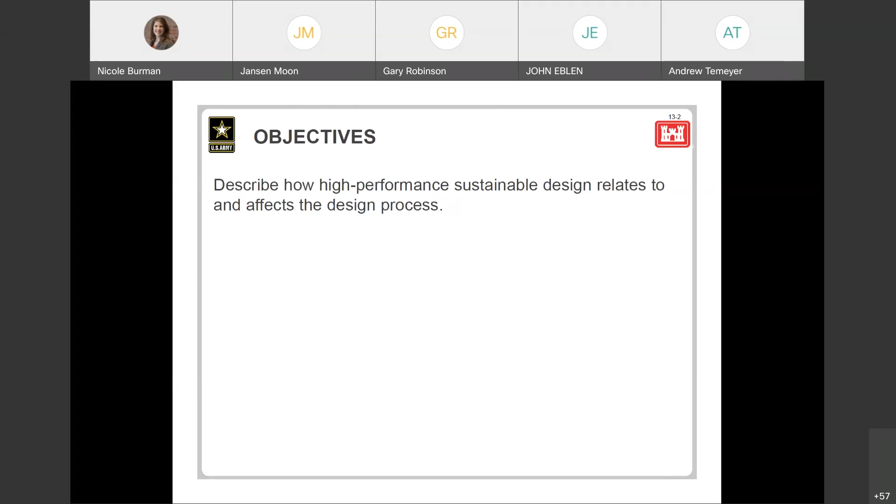So the objective today is to describe how high-performance sustainable design relates to what we call a typical design process, and we're going to try to kind of wrap a bow around some of the topics that we've talked about during the programming phase and describe how all of this relates to the total project delivery lifecycle.

As far as resources go, there's quite a few. I even cut some out from what we sometimes present, but obviously there's UFC 1-200-02, International Green Construction Code. There's plenty of LEED resources online. As far as how we relate this to the typical Army project delivery process, AR 420-1. The MRSI site is still available and has some resources. I'm not entirely sure if all of those resources are current, but there's still a lot of content on that site. If you are looking to relate this to Air Force design and construction process, there's AFI 32-1023 and a variety of other AFIs that you can begin to look at.

And then ultimately, over the last couple of years, there seems to be an effort to reconcile our design process and design vocabulary with maybe more industry-wide terminology. So you'll see a little bit of that in this presentation. The Architect's Handbook of Professional Practice is where we're pulling some of the design phase terminology for this presentation.

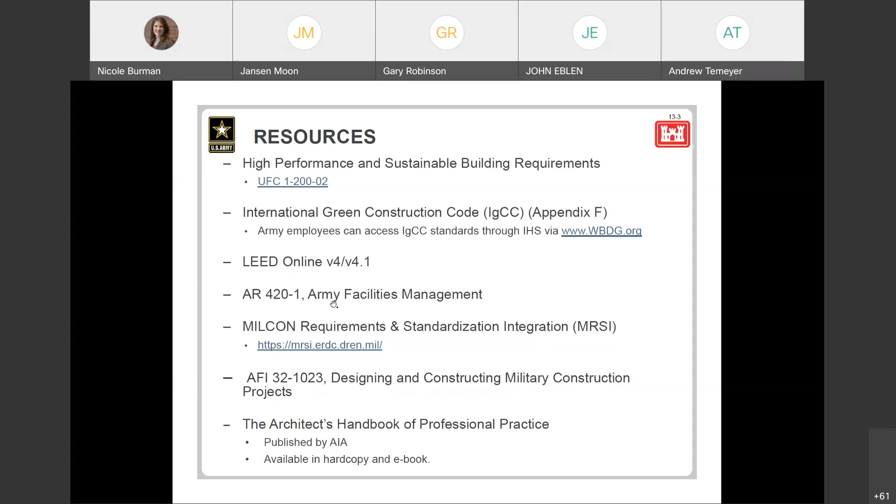And once again, when we talk about that terminology, schematic design, which we're going to roughly state is up to 35% design. Design development is 35 to 65% design, maybe in some more Army or USACE-based terminology, and then construction documentation would be from 65% to 100% design.

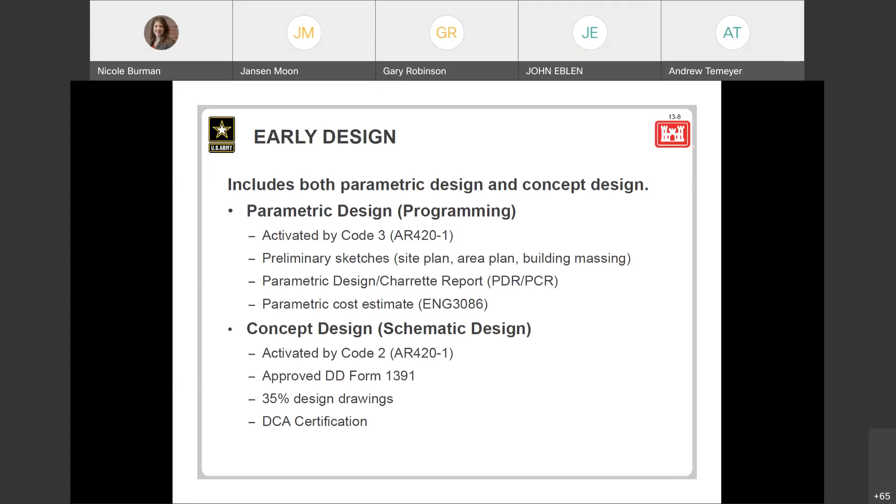Here's a side-by-side comparison. We've already talked through parametric design, and we've also talked about concept design to a certain extent during the programming presentation a few weeks ago. Ultimately, the OSD policy that we'll do a little refresher on has really forced our projects to accelerate to 35% design in the total project execution timeline, so that our projects have a level of definition early, giving our stakeholders the opportunity to change their 1391 scope and budget thresholds with a more robust design. So under parametric design, you're more high level, trying to have a basic study of the project scoping requirements, and then concept design builds on that to approximately a 35% design effort.

As a reminder, for programming you're ultimately identifying a project team, conducting research on project requirements, your location, maybe some basic study of your building form. You're starting to talk about sustainability features, but probably more broad strokes. You may be doing a deeper dive on new technologies and systems appropriate for the project, looking at low impact development and shared resources the project may leverage in delivering a more integrated project. You're setting and prioritizing scope and budget goals, and ultimately developing a 1391 or draft 1391 and a parametric cost estimate.

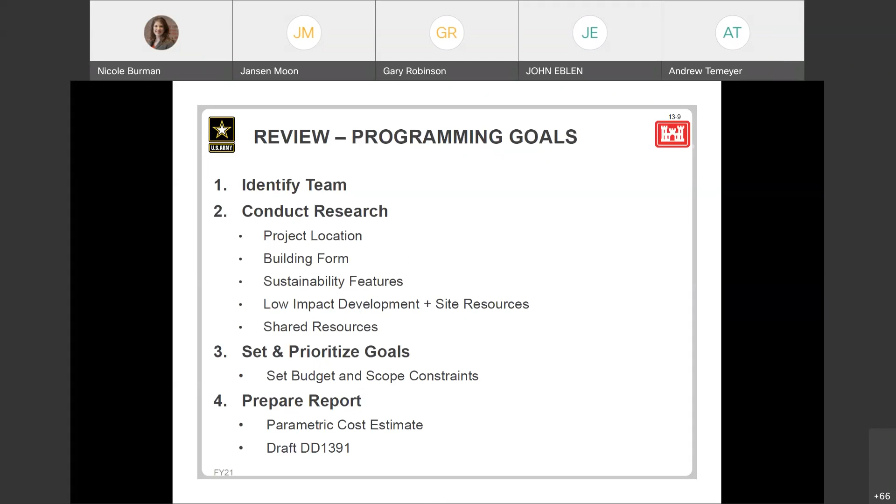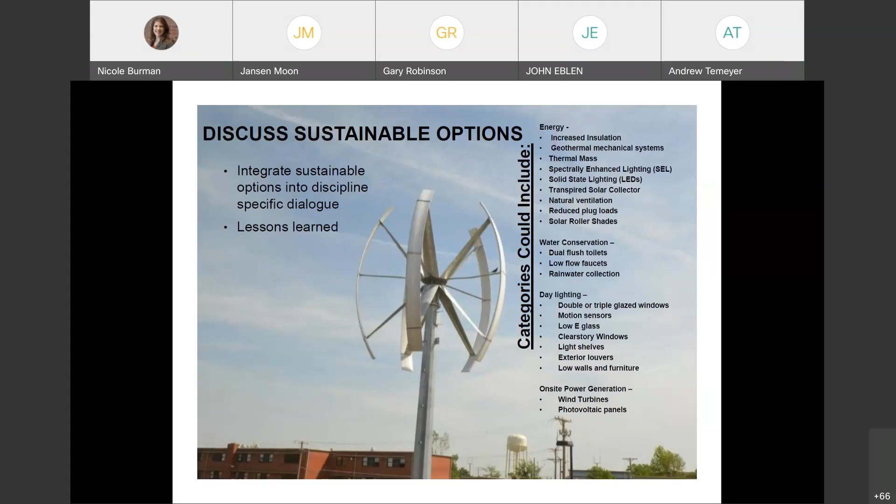Sustainability is still part of that conversation. There are all kinds of sustainable features that could be part of the discussion during these early phases of the project delivery process — we're not going to go through all of them.

Energy modeling is still part of the equation. You can start some preliminary energy models, as we talked about. They don't have to be the full-blown compliance models you'll see later in design, but some quick modeling, some massings, a study of building form and shape, or different building systems in a more iterative process to help determine the proper system selection for your project. You can do things like daylight analysis or study of orientation on the project site to help hammer down how much square footage you need in the 1391.

This is just a reminder that there are all kinds of tools out there to help you conceptually understand your project requirements and study those in order to make sure you can deliver on those goals later. I think some of this was output from Ecotect — I'm not even sure that's a software anymore, maybe we need to update this slide.

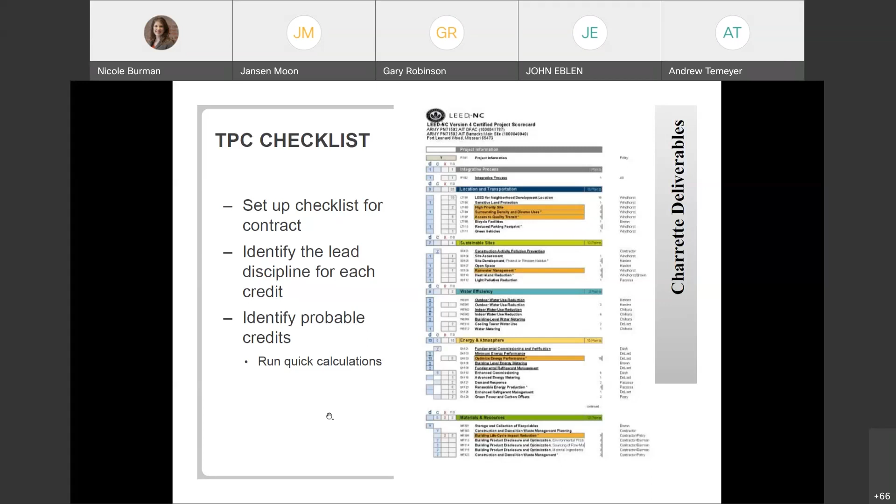It's never too early to start your third-party certification checklist. The different services have different third-party certification requirements, but ultimately you can start getting a handle on what credits you think may or may not be applicable to the project. You can run some quick calculations, and like we discussed during the programming discussion, sometimes you can even start running actual calculations on water savings and stuff like that. You really can start diving into this early so you're not surprised by constraints later.

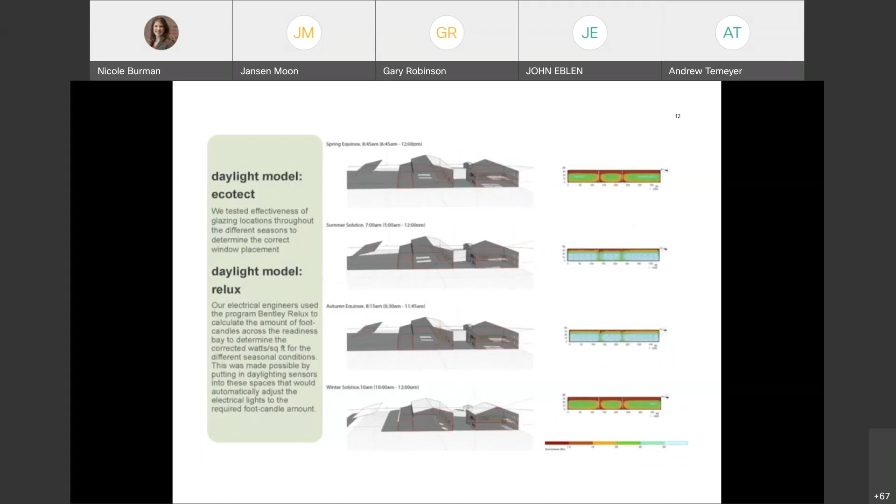Do you know what software for the daylighting was shown for modeling? I believe this was our question. I don't know if it was this page or the one before. Yeah, I think this one was Ecotect, listed up here in the little green box. Once again, I'm not even sure that Ecotect is an active software. It was produced by Autodesk, but looking at the previous page, actually. Was it? I know this is from Ecotect as well, the daylight analysis.

I think we've used different tools within our district. You can do something simple, as long as you orient your model correctly—you can use SketchUp. Ecotect used to be a tool that we used. We haven't used it recently, so I apologize that I don't know whether it's still available, but I don't think it is. We've done some more robust analysis in AGI, but that's certainly not our preferred approach. It's a little too complex for the level of development we're typically at at this stage.

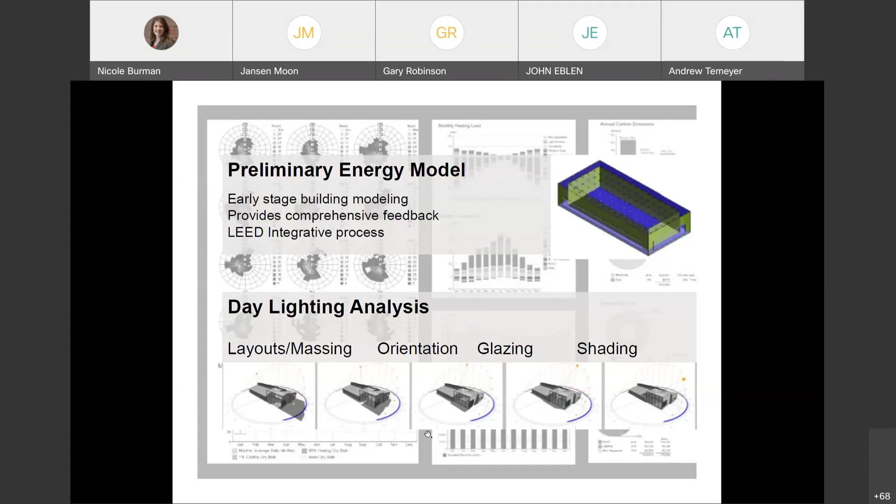You should also be completing your sustainability record cards. There are different record cards for the different services. I believe this is the Army one, and it can be found on the whole building design guide, but make sure you're using the correct one. I think most services are tracking some sort of compliance tracker like this, and ultimately these are supposed to be completed at each design phase. I'm not aware of any that aren't. It helps make sure you have a good pulse on sustainability mandates, metrics, and requirements throughout the project lifecycle.

All of that is done in service of making sure that when you kick off your schematic design phase, you're as well positioned as you possibly can be. With these current OSD requirements, it certainly feels like there's a huge rush to get to 35% design right now, and I'd argue that's to the detriment of the project and the PDT. But ultimately, having a robust and complete PDR or PCR document and associated programming documents really helps make sure the project starts off on the right foot.

So kicking off the schematic design phase, it's extremely important that you identify a project delivery team to the greatest degree that you can. Make sure you have a handle on your programming constraints via some sort of draft DD 1391. I see in our presentation we kind of switch between a draft and an approved one—I think that's partly confusion with these new OSD requirements, which we'll dive into. You should have an idea of the owner's project requirements defined by the PDR or PCR, and then either have some indication of a basis of design, or you'll be defining your basis of design through that schematic design phase.

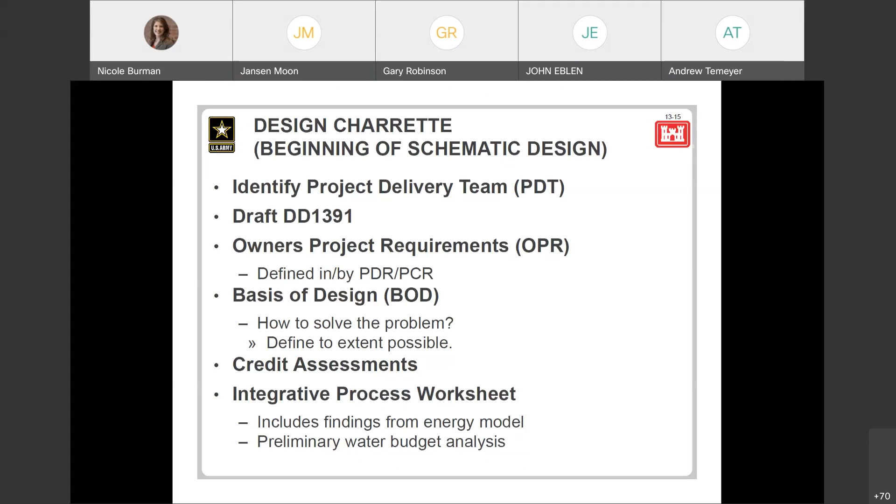As far as identifying your project delivery team, this is a lot of times managed by the design team lead or the project manager, the two working together. Develop a PDT directory and make sure the PDT all understands who plays what role. This helps identify and create a sense of responsibility and ownership in the project, and hopefully gives the team a broader picture of all the individuals that support a project. It's not uncommon, if you develop one of these on a fairly straightforward project, to have 50, 60 people supporting a project in one manner or another.

Make sure that roles and responsibilities and lines of communications are clear. This is another topic we'll cycle back on - we're all aware of the complexities and timelines associated with the design process, but it's helpful to keep your PDT as consistent as you can, from programming all the way through construction contract award and beyond. The less turnover, the less potential for lost knowledge or inability to reach out and understand the guiding logic for why certain decisions were made.

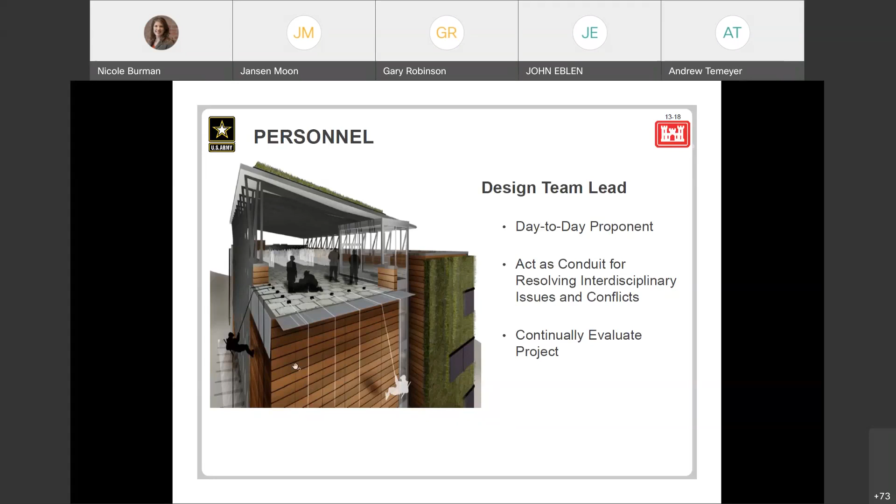I think it's really important for your design supervisory structure - sometimes it's easy for managers and supervisors to lose track of the ever-evolving policies and requirements associated with sustainability. So make sure there's an awareness that continuing education is going to be necessary to keep pace with all of that, both within the staff and the supervisory structure themselves.

I'll speak for Omaha District - I think it's been a bit of a struggle sometimes to include robust QC procedures on specific sustainable deliverables. So that's something we're continually trying to improve upon. Things like QCing LEED forms and things like that, they kind of happen off on the side, and ultimately those are really critical to making sure your project succeeds on a sustainability front. So again, I'm not sure I have all the answers to that, but I think that's something there needs to be awareness of.

And making sure there's an awareness that when we talk high performance sustainable design, it may require more specific skills, and may require a bit more effort during design phase and some additional time, or it may need to be staffed more appropriately, as well as design budgeting. The whole idea of this process is that we're spending a little bit more time in design, a little bit more design funding, to realize a more high performing solution that will operate more efficiently in its end state or in operations.

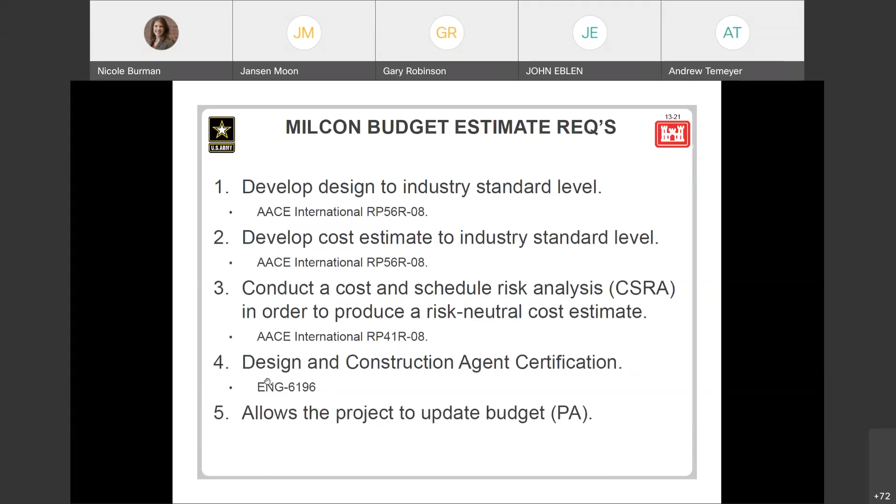And the whole power of this is that it allows our stakeholders, if they so choose, to adjust their budget within the typical budgeting life cycle for a project.

Again, during schematic design, it's not super centric to the DCA process, but research products and equipment, meet with product representatives.

This is probably focused on, obviously every project is not completely unique on its own right. Projects are often the result of some variation of the last project that the PDT executed, and so you're building on experience that you have collected over time.

Ultimately, there should be some focus on doing a deep dive and investigation on systems that you're not familiar with, and then delivering on that in a manner that allows you to manifest those in design and design detailing throughout the project lifecycle, to prevent the possibility that you lose sight of that somewhere along the timeline, and end up with missed expectations or inability to integrate that within the project constraints.

Then begin to develop a more robust understanding of how different systems are going to integrate with one another, and continue to perpetuate that trade-off process of how wall color may affect my lighting design, or how my exterior wall selection may impact or limit or promote mechanical and electrical design decisions. Make sure that there's always some natural tension there, but focus on balancing those priorities in a more unified and integrated solution.

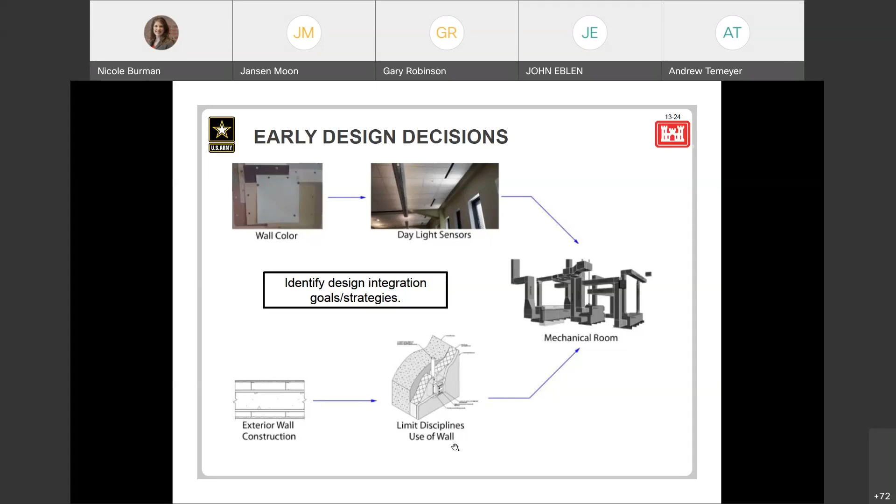So ultimately, things like, this is just an example, solar tubes. I'll speak for our district. It's a sustainability feature that we've used a lot, and we seem to favor, because they provide a huge amount of daylight with minimal cost input, and they're fairly easy to integrate into a design. However, they do affect things like your artificial lighting design, and they may impact certain structural design decisions or finish selection, things like that.

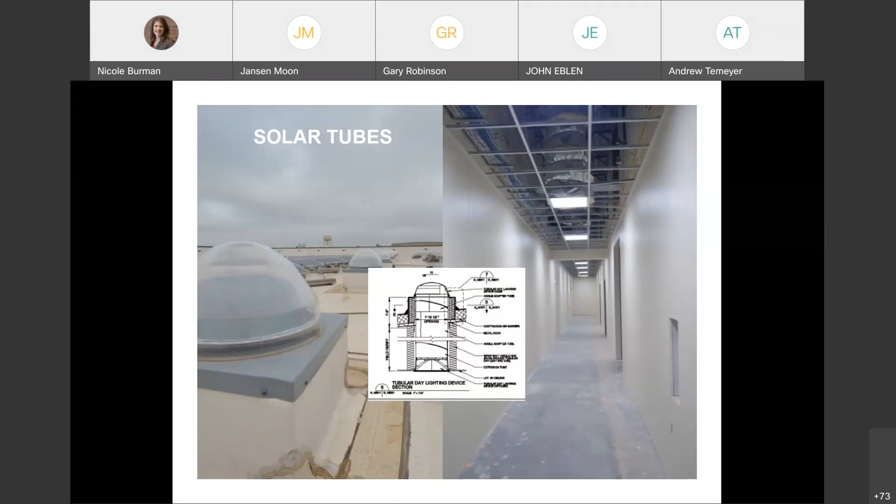So make sure that those preferences are identified early, and that the entire PDT knows that those are being tracked, so that you can coordinate those throughout the project lifecycle. Begin your LEED credit documentation.

There's all kinds of documentation that can happen early, and I think we've talked about some of this stuff before, but ultimately, define your FTE count and analysis. We sometimes do this as a memo, so that the PDT can pull it up, include it in the design analysis. This is not your code-based occupant analysis.

This is more of a sustainability-oriented analysis. How many people are going to be in the building? How many transients may you have? What's your building operation schedule? Things like that, because those will impact mechanical design, or may impact your electrical design, as well as the architecture of the building.

And so you can also begin, and sometimes even finish, your water calculations, get a grasp on things like sustainable site credits, and a variety of other things.

Storage and collection of recyclables may vary a little bit depending on what third-party certification tool you're using, and what the installation level process is for storage, collection, and disposal of recyclables.

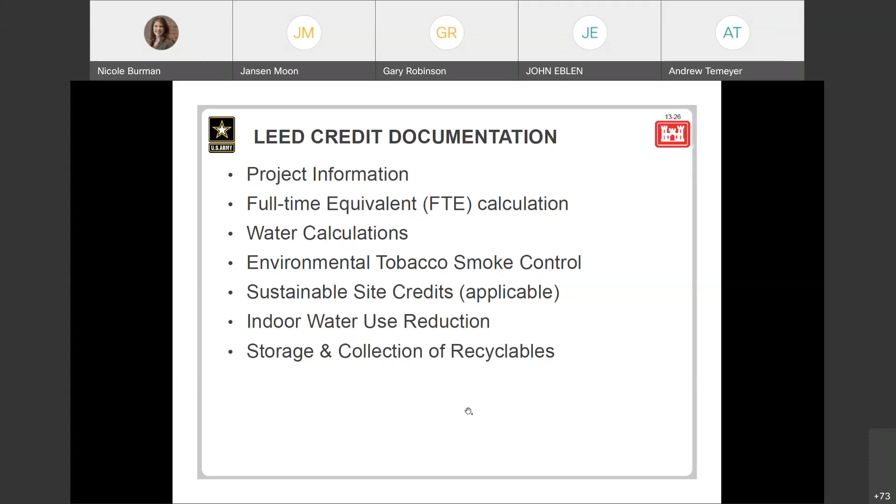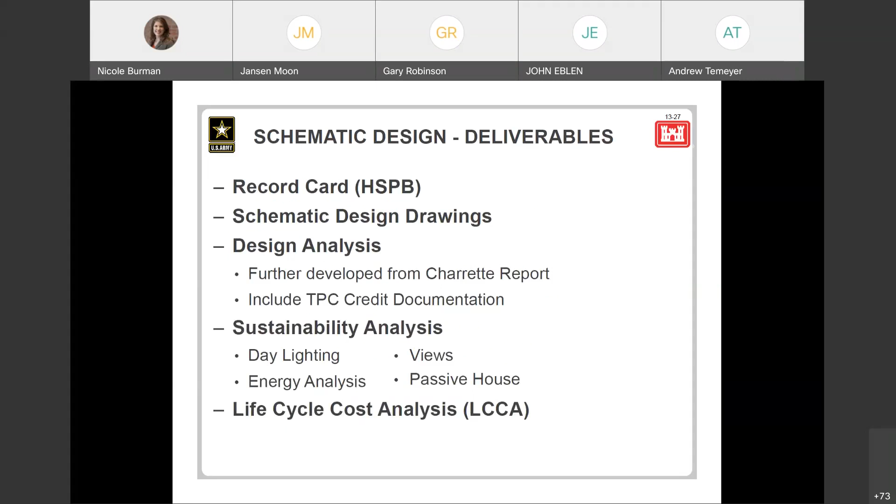Again, we're kind of starting to bridge between the design year and budget year, and that transitions us into design development. So in trying to tie a bow around what the goal is for design development, you're trying to identify, coordinate, and make all design decisions that affect other design disciplines. That's in service of making your construction documentation phase that follows this as simple and as risk-averse as possible, as far as design changes and things like that.

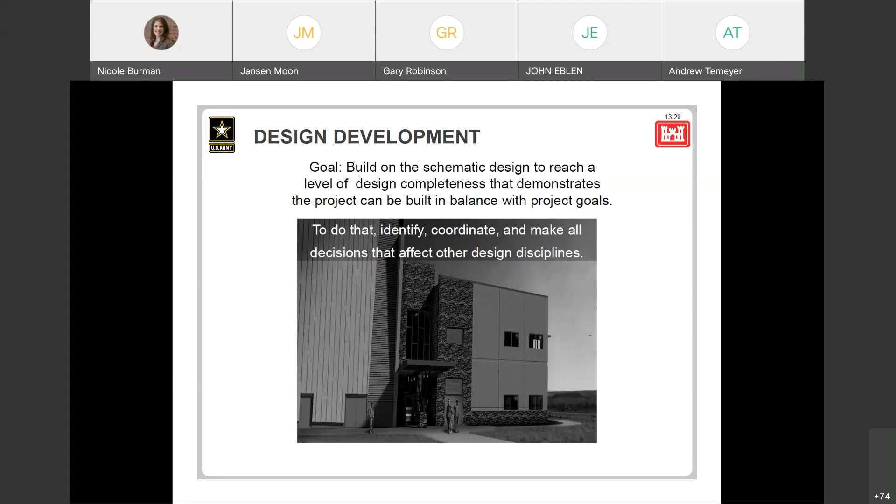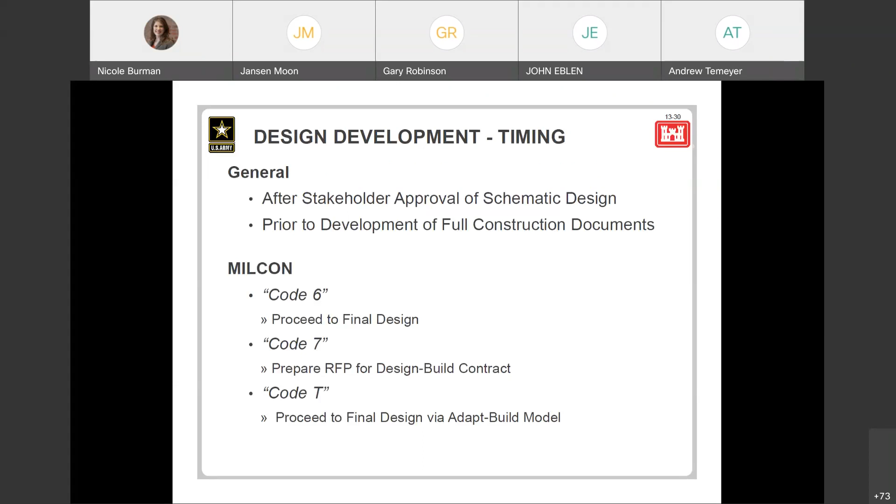This will occur after stakeholder approval of schematic design and prior to development of your construction documents. The MilCon code directives that you'd probably see attached to this are Code 6, Code 7, or Code T. Those are defined on the screen here, and again, those are defined in your AR 420-1.

I think there needs to be a pretty robust understanding that the whole idea with high performance design is that you are spending a little bit more money for a longer term payback, whether that's on the design or construction side. There's a huge burden on the PDT to do this, and there's a lot of contention about whether that means we can increase our design budgets, or maybe we're not getting more design money to deliver these projects. Ultimately, I think we've got to figure out creative ways and prioritize our level of effort in order to deliver on these expectations.

With high performance sustainable design, a lot of our processes come out of iterating on the last way we did things. So a lot of times our standards are developed out of how we did things in the hand drafting days, then they were modified for CAD, and then modified for BIM design delivery. Ultimately that's all rational and good, but at some point there probably needs to be consideration of whether there are certain things in our standards and processes that we should rethink to assure that we are delivering in the most cost-effective and efficient way possible.

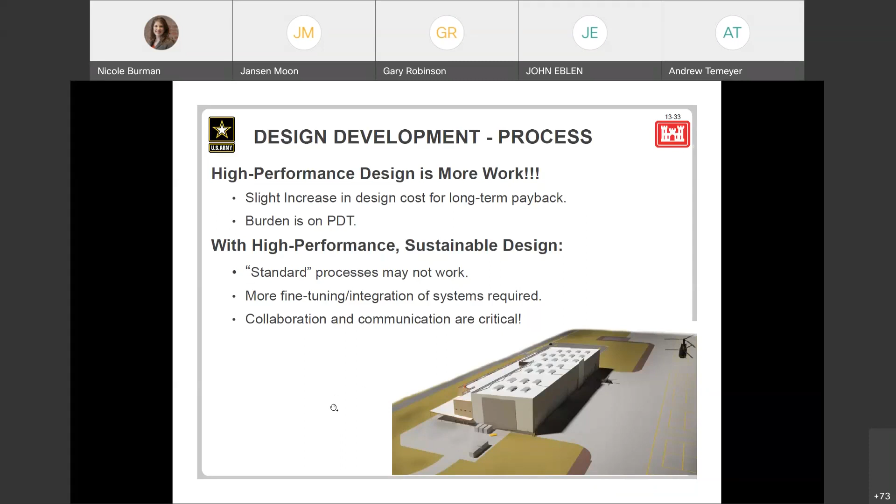As far as processes and making the most of the design development process, I know we talked in the prospect course about creating an environment where collaboration can happen.

In Omaha, we have what we call a BIM pit. It was created a long time ago. It's basically a room with a bunch of docking stations and screens where we can go in and collaborate in our BIM models. All of our designers can get around and in the same room and coordinate things that otherwise would probably happen in a cubicle, with the lines of communication a little bit disconnected. I'm not saying that's the end-all be-all solution for integrated design and collaboration, but think about ways that a PDT can do that. In the virtual world we're all kind of working from home now, those things may change a little bit, but I still think there's ways we can establish a more collaborative environment, and we need to find a way to do that.

Make sure that you're using the correct design tools for the level of design and development that you're in. I know we've talked about this in BIM circles quite a bit, but we tend to automatically default to the end product that we would do our CDs in. So if you need to do an adjacency diagram in planning, programming, or even schematic design, a lot of people would immediately open Revit. Well, is that really the right tool to communicate what you're trying to communicate? Is it requiring more effort than the payback figure you get by doing it in that tool? Make sure you're cognizant of not burdening yourself with just the default solution.

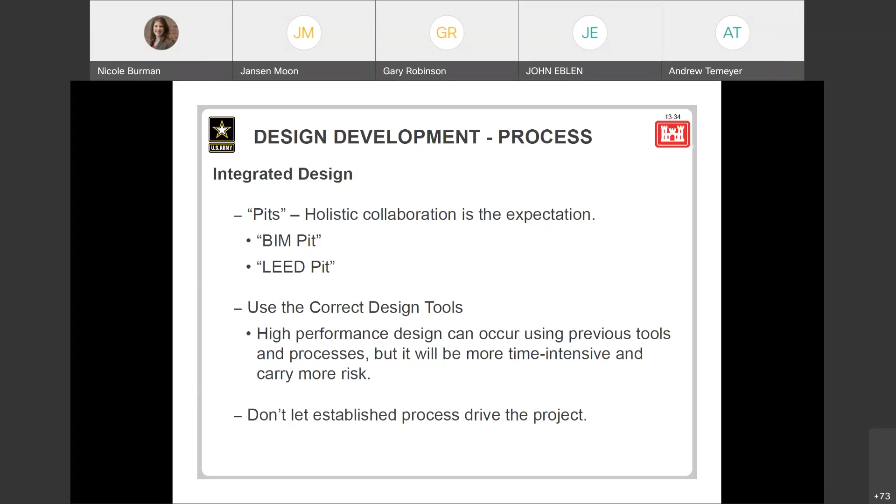Maybe a PowerPoint slide is a better way to communicate some of that stuff, and it would require a lot less time and effort on your part, and then you can catch up on the BIM stuff when you have a more resolved and clear idea of what you're modeling. And then try to resist letting established processes and norms drive a project in a certain direction if that's not what's best for the project.

Spend a little bit of time talking about BIM here. Ultimately, building information modeling, or BIM, is something that's at this point not that new to the way we deliver designs, but I'd argue it's absolutely a critical tool for facilitating an integrated design process. Using BIM is not going to make your project more sustainable inherently, but it creates a collaborative environment where not only are you looking at lines on paper and relying on your brain to manifest those lines in 3 dimensions, it creates a virtual reality representation of the building that you can then run, I'd argue, a lot more nuanced conflict resolution and integration against.

There are all kinds of BIM tools and BIM systems and potential analyses that you can conduct with all of the data that you feed into a BIM model. But once again, it requires a little bit more input of data on the front side in order to provide a more integrated solution on the back.

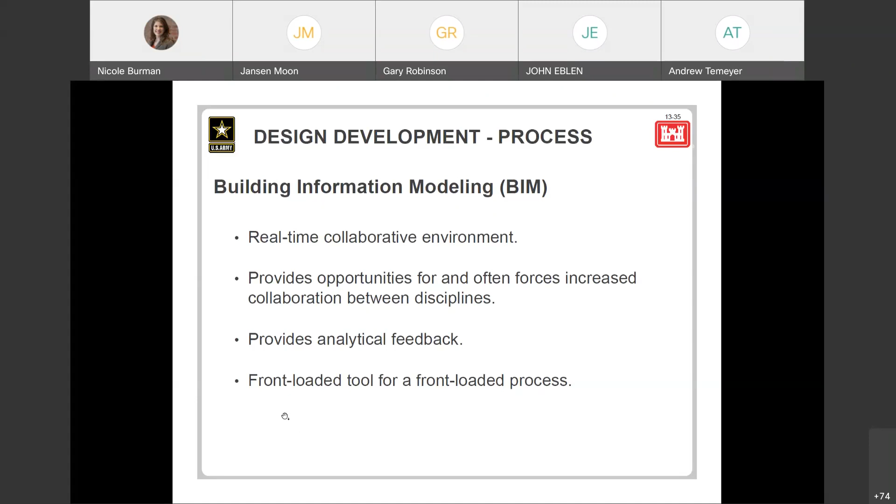Touch on energy modeling here. A lot of times it seems like energy modeling is something that's owned by, say, the mechanical engineer, and it's not clearly understood by the entire PDT, and it maybe is done once as a compliance model somewhere during the middle of the design process.

Ultimately, I really want to emphasize that energy modeling should be an iterative thing. You may not be using the same tool the entire time, but find a way to use energy modeling, whether it's conceptual energy modeling or compliance modeling or something in between, to drive design decisions. Ultimately, during design development, you should be finalizing your concept models and helping resolve complex coordination type interdisciplinary decisions and beginning your compliance models.

But do what you can. I know there's some software type limitations with energy models, but make sure that the entire PDT has some sort of access to the energy model and outputs to make sure that the correct inputs are being put into those systems.

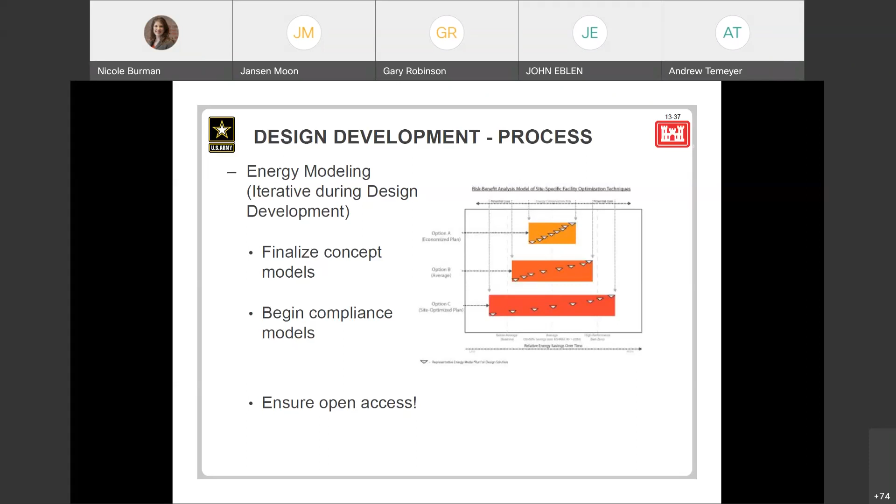So as you go about producing design development deliverables, I think it's really important - there's all kinds of standards out there about what we need to produce for deliverables in, say, a 65% design. But maybe think about the focus on really front loading all of this data input and analysis into a 65% design effort.

I think it can be stressful as a design team member to feel like you also have to produce deliverables that are maybe what a 65% CAD drafted solution may be. So ultimately, I think what we find is a BIM model has a lot of data and information in it, but if you have to feed that model with this vast quantity of information and modeling, it's also difficult to extract that information in the form of drawings and schedules on sheets in a time frame that's often expected of us.

So think of ways that you could potentially provide a stakeholder with the information they need, but in different formats. Could that be a virtual BIM model walkthrough? Could you work through the schedules in BIM rather than focusing on outputting them onto sheets? Is there a better way to deliver that information to assure you're going in the right direction, but also not creating a bunch of work that's not commensurate with the level of input you've already invested in the design?

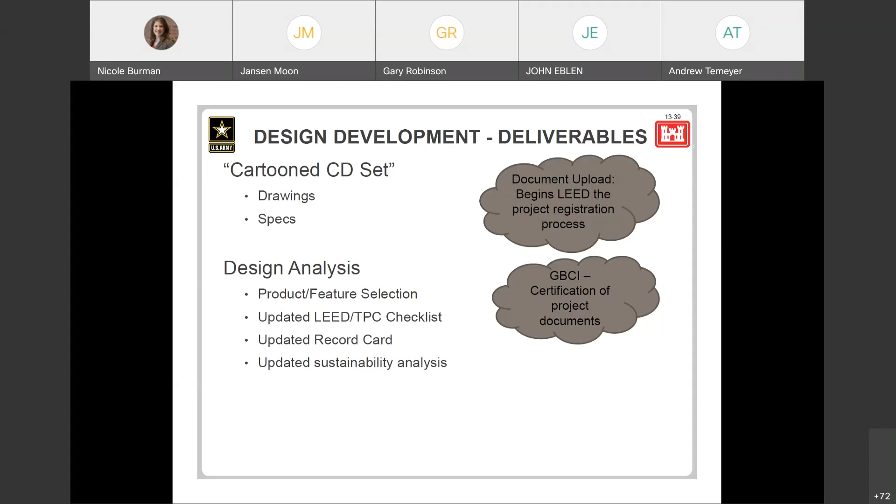Ultimately, you're looking to deliver in design development a cartoon construction document set that includes drawings and specifications - an idea of all the drawings you'll need to clearly communicate the design - and then a pretty complete design analysis that includes product and feature selection for the entire design, LEED or third-party certification checklists, another version of your record card, and a robust sustainability analysis that includes all of the analysis and inputs you've provided or applied to the project to date.

Again, as you go through design development, your main goal is to make all of those interdisciplinary design decisions so that as you move into construction documents, the burden for conflict resolution is as minimal as you can possibly get away with. Ultimately, you're still going to have to coordinate things during CDs, but your goal should be to minimize that burden. The reason is that the more interdisciplinary coordination you have to do during construction documentation, the greater the risk you may find a fatal flaw in a product or system selection that may translate to difficulty following through on goals and decisions made earlier in the design process.

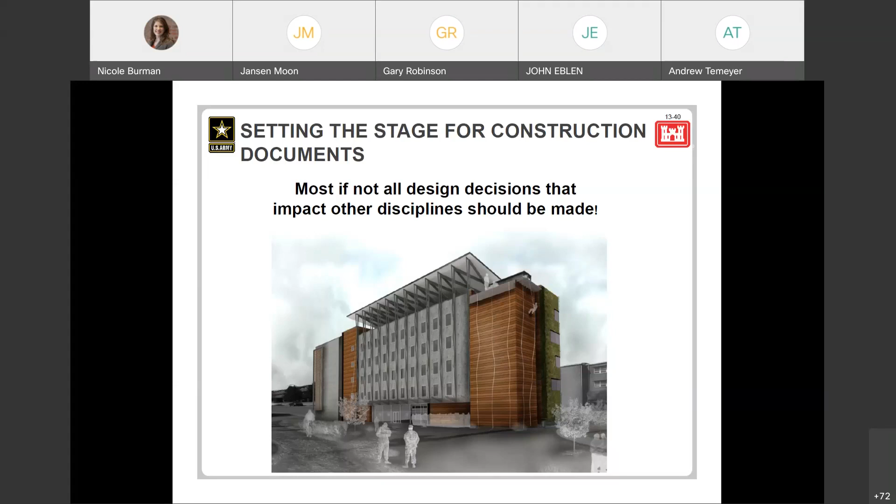Okay, so construction documentation phase. Sometimes it feels like this is the entire phase, I guess. Sometimes it feels like we start off at 35% design just focusing on producing construction documents. Ultimately, I think we're trying to create a distinction here that construction documentation is extremely important, but it is not the only thing you should be focused on as you deliver high performance integrated design.

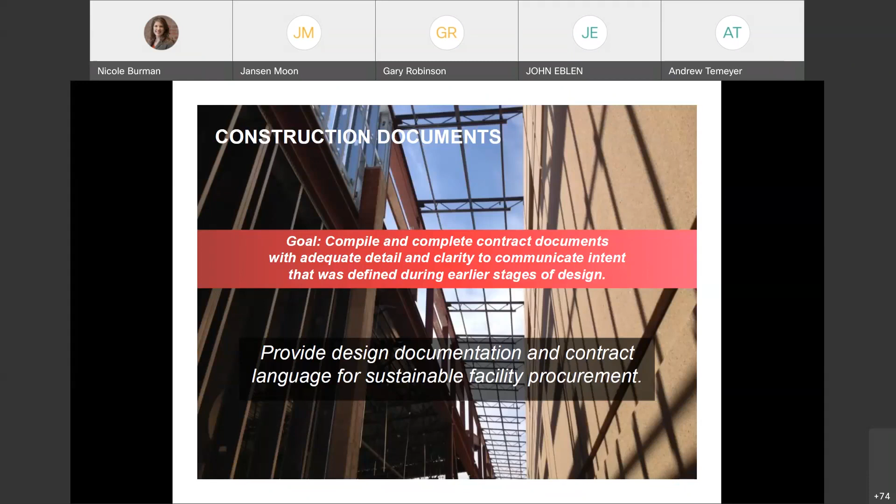So construction documentation phase is compiling contract documents with adequate detail and clarity so that you can execute a contractually enforceable construction contract. This occurs after design development - not during, not before - and then prior to advertisement and contract award.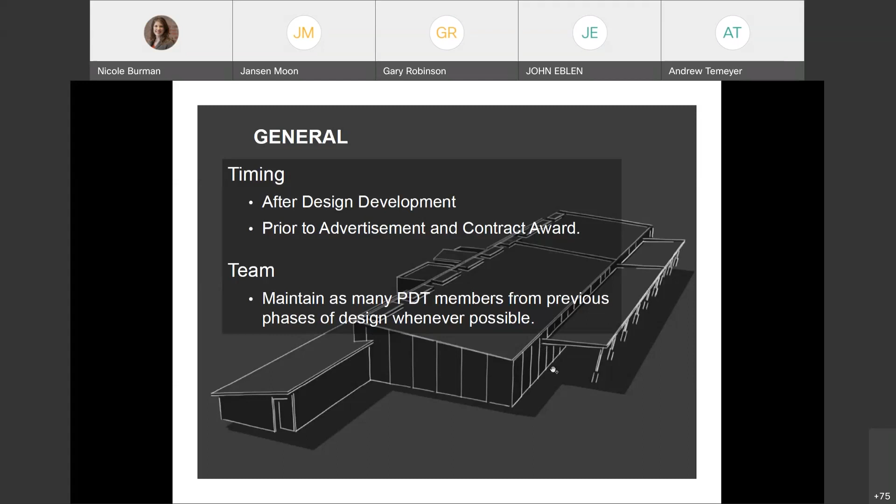It's beneficial typically to the entire PDT to keep as much continuity between your teams as you move all the way from programming to schematic design, design development, and construction documents. There's obviously some change that's going to happen, but typically the best recipe for success is to maintain that continuity.

Andy, we have a couple questions. There was a question before about a good daylighting analysis tool in Revit, if they have one that's working with LEED daylighting credits. I cannot recall the one that we've recently got for NWK.

I don't believe we've purchased an AGI plugin, but I can do some research on that and see if I can provide a response. I don't have an answer offhand.

Ultimately, I'd say the natural tension in our district is who owns daylighting analysis. Is it the architect's problem or is it the electrical engineer's problem? That debate kind of goes back and forth. But ultimately, I think it's a shared responsibility. And then the question is, what's the best tool to do it?

I know we've done daylighting analysis in AGI, in standalone AGI. I know we've done some analysis a long time ago in another Autodesk product, but it was very cumbersome and represented a lot of duplicative effort. I believe there are some LEED plugins that will provide LEED compliant output, but I don't know the titles offhand.

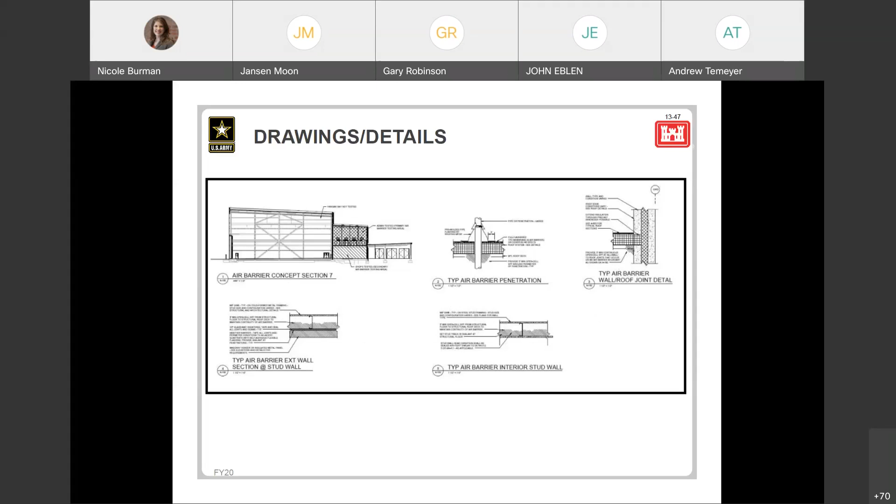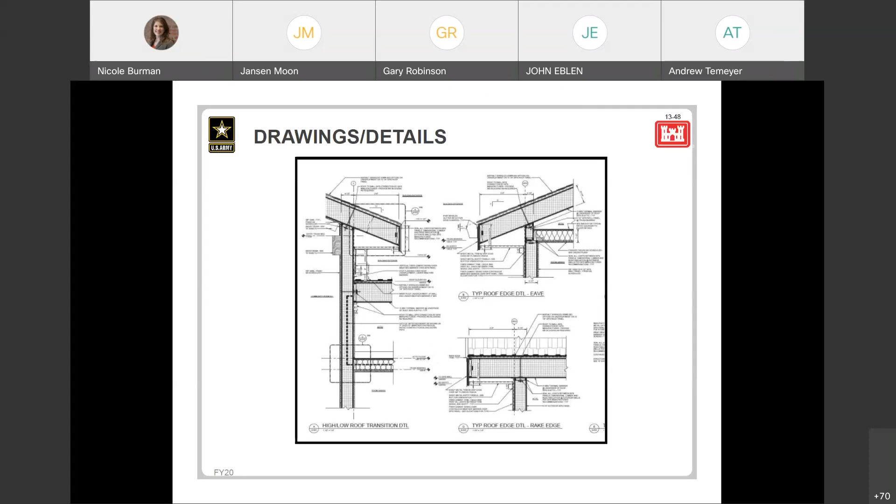As you develop design drawings, ultimately think about how you can convey sustainable intent in the clearest way possible. There's nothing sacred about these details, but we were trying to communicate not only the air barrier boundary via a conceptual section that shows the perimeters, but how individual details may be addressed all on the same sheet, rather than being scattered across plans, sections and details. It's all right there for somebody doing air barrier testing to show that intent, and it can be referenced and reinforced throughout the remainder of your sections and details. These drawings show continuity of an air barrier - they're not easy to read on this screen, but they show what your intent is and how things are terminated and integrate with one another.

In this case, I think we were trying to show continuity of perimeter insulation as it translated up from the foundation wall into and through a slab in the context of a SIPS panel wall system.

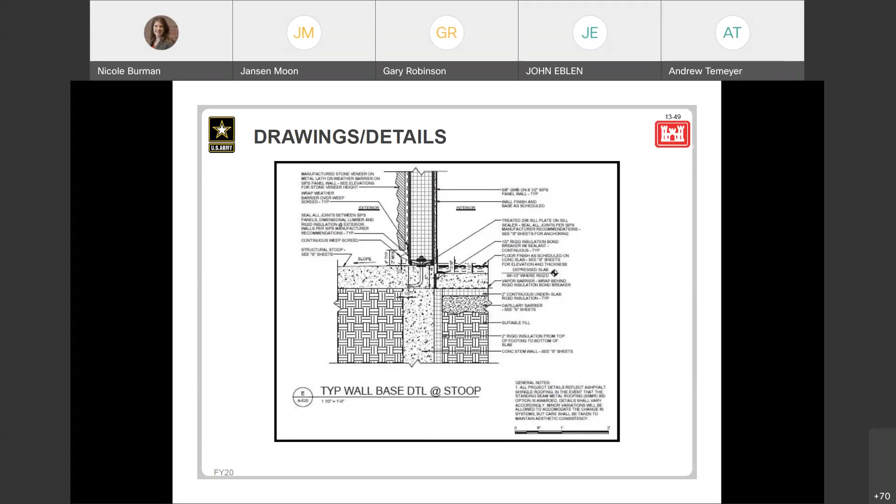Again, on specifications - we have guide specs, and I'm assuming you're using guide specs, though that's obviously not the case with all stakeholders. I think VA uses their own specs. Make sure your sustainable intent is throughout your specifications. The different UFGSs are obviously being maintained, but every once in a while you have unique project constraints that you need to apply, and you may need to write some additional language. Make sure the sustainability requirements spec is in there, attach your LEED checklist, attach your scorecard if the contractor needs to maintain it through construction, which is typically the case, and include all those other appropriate specifications.

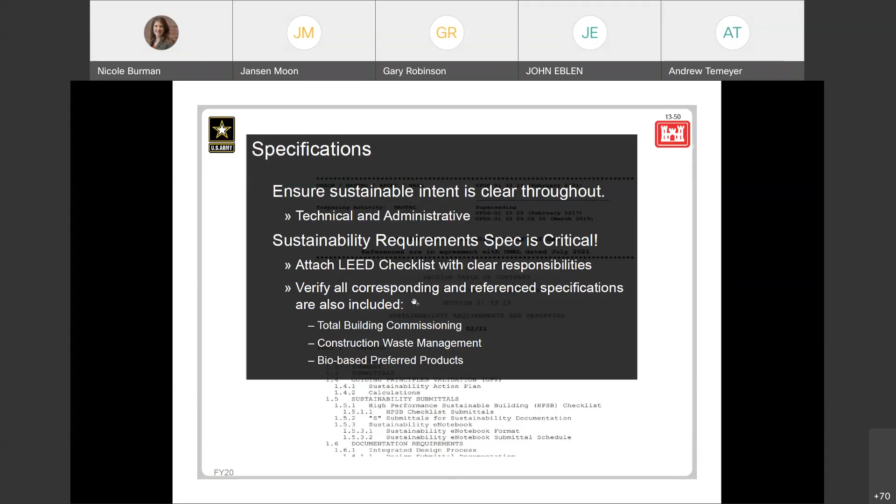So, total building commissioning, construction waste management - there used to be a bio-based, bio-preferred products spec, I think that's incorporated into another spec at this point in time. Make sure all of those things are manifested there, otherwise you're going to end up with missed expectations in construction.

I'll add fast to this idea of adding to it when you need to clarify something. An example - I don't know how many of you have experience with campus sites for third party, but that's one area where we have plenty of lessons learned on making sure the specification really defines that relationship, especially when you have multiple contractors working on a campus project, and making sure that language is clear and added to that specification.

As far as submittals go, make sure it's clear within your contract what the processes are for including applicable submittals in your sustainability e-notebook, and make sure it's clear to the contractor that certain products and requirements need to be considered as part of this project's sustainability goals.

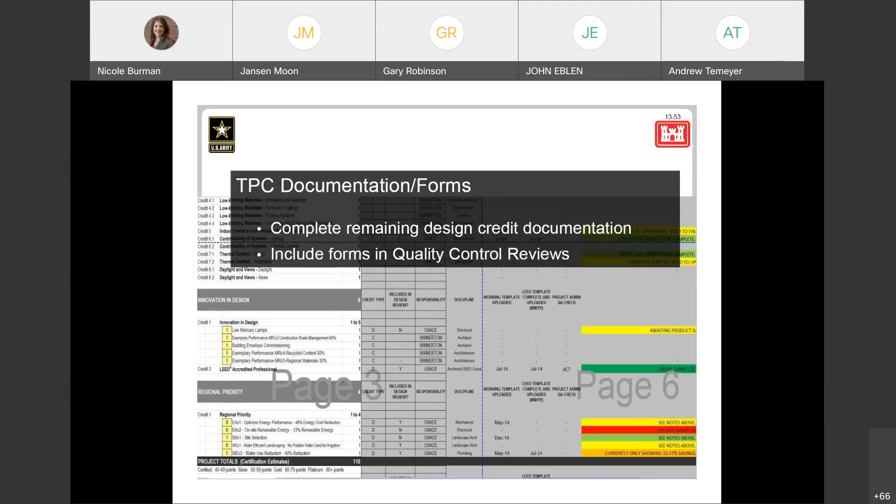Hopefully a lot of your third-party documentation is already complete. To be transparent, we have a tendency to put this on the back burner until late in construction documentation - that's just a recipe for missing goals and things like that. So, do quality control on this stuff so that everybody's delivering it with a consistent level of quality across your district.

Your design analysis is probably mostly complete, but update it to show any changes to design and coordination with other systems and subsystems. I don't know that it's a requirement, but think about how you communicate sustainability in your design analysis - is it fully integrated throughout all designs? Do you have a standalone section? Do you have a summary document? It may depend on how your district goes about communicating those things in their templates and standard process, but I think there's a variety of ways to do that.

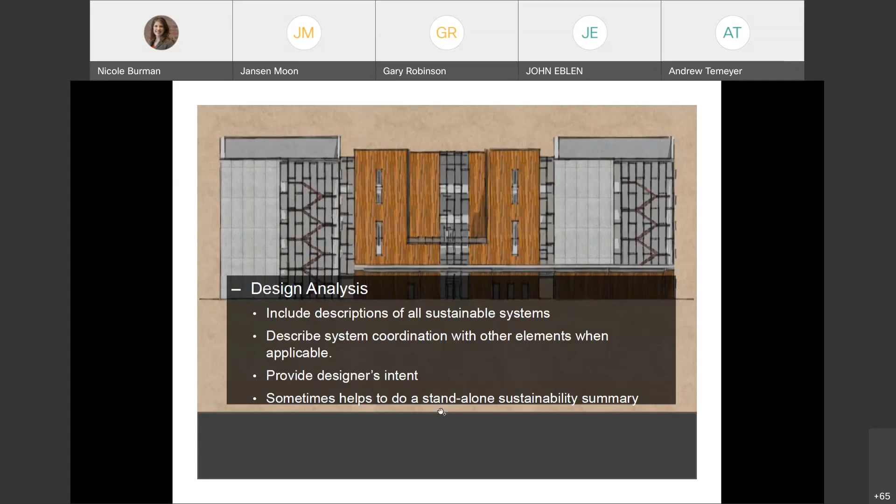Ensure that all elements of the UFC are covered, so people know the history of it and how you're complying. Nicole, I don't want to speak for you, but I think the sentiment is it's easiest to put it all in one spot in one way or another - otherwise things get missed. But there's obviously different ways. Yeah, that's how we handle it.

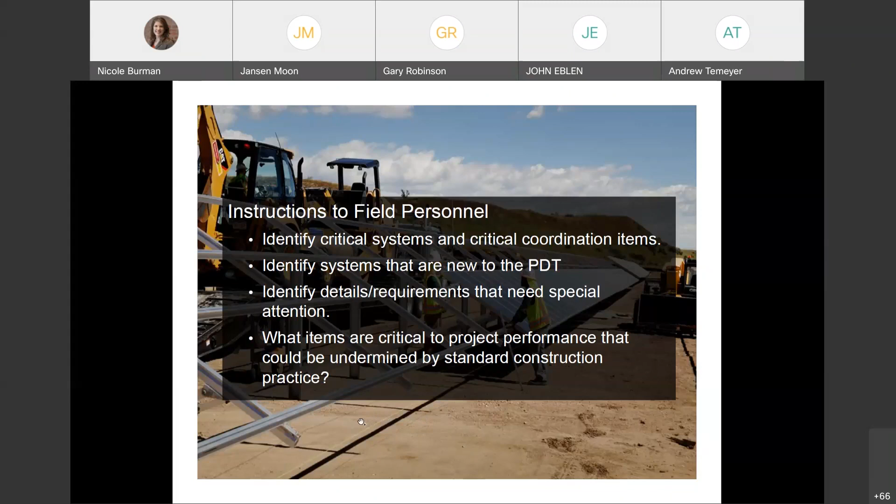Again, instructions to field personnel - Nicole and I were talking about this. There's kind of a debate on whether this can be a part of the DA or just a standalone document. I don't think we're here to tell anybody which way it has to be, but it's still an opportunity to communicate additional intent and critical systems that need to be followed through after construction contract award.

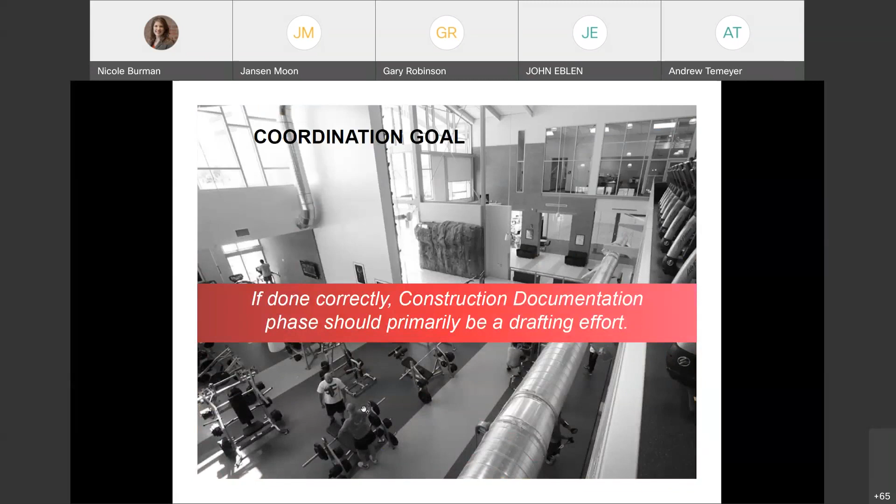Once again, the CD phase should probably primarily be a drafting effort and a spec editing effort. Hopefully a lot of your coordination is already complete, so that if you follow the stereotypical project delivery timeline, your solicitation and award can occur either starting late in your budget year and awarding early in your program year, or completing your CDs early in your program year for a later FY award. Obviously, that's very dependent on your acquisition strategy and things like that.

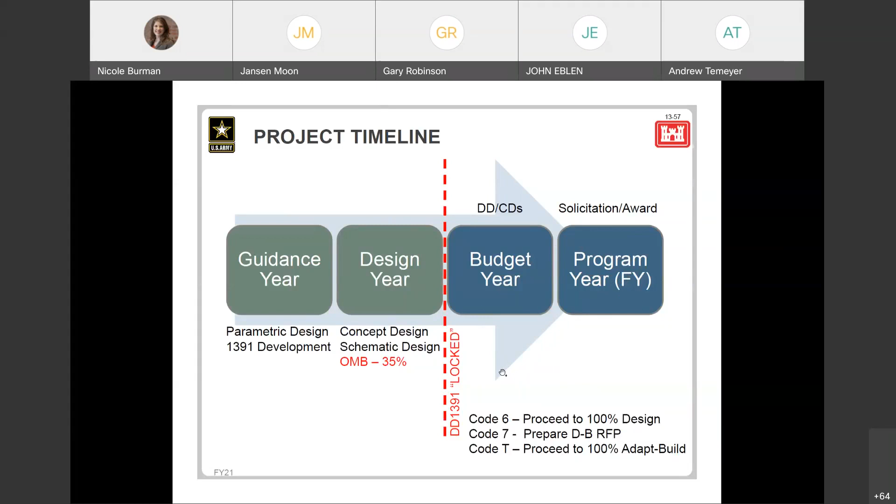We're kind of running out of time, but ultimately we had some discussion about triage. What we're trying to reinforce here is that you have all kinds of resources Corps-wide, and you can prioritize your efforts. Sustainability isn't the only priority on a project, but it's definitely one of them. Spend some time to figure out how to balance all of your project's expectations and focus your efforts on the things that really need clear and consistent design communication.

There's all kinds of resources, whether that's inter-district coordination, reaching out to your sustainability leads within your district. You can also think about alternate procurement strategies. We don't have that much time to dive into all of that, but at least make sure you're asking the question. It's probably better to ask the question and come up empty than to not ask the question at all.

I think Annette's trying to emphasize, maybe as a bullet on this last slide, that ultimately, whether it's in your design analysis, in your specs, or within your RFP, you need to make clear the intent of what you're trying to accomplish through the design process. Somebody will be able to pick up on that, and if the execution isn't 100% what you want it to be, perhaps it's something you can build on and learn from for the next project.

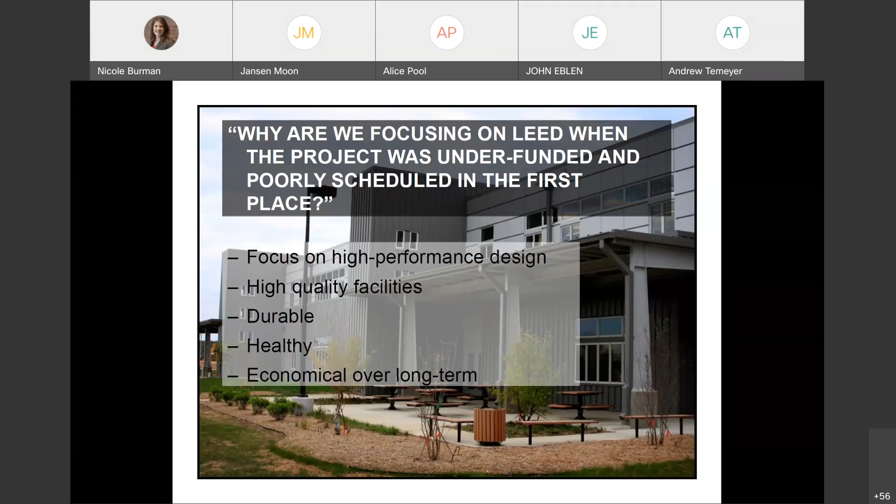So again, this is one of those statements: why are we always focusing on LEED when the project's underfunded and poorly scheduled in the first place? Well, number one, it's because it's a building code requirement per the USACE. But ultimately, I think the pivot is to focus on high performance design, because this provides a return on the taxpayers' dollar investment in a federal facility. It's for the betterment of operations and maintenance of the facility, and yields durable, healthy, and economical facilities over the long term. That's ultimately what we're trying to accomplish.

So today we circled back on programming. We talked about how to investigate design intent through schematic design. We touched on the OSD DCA process, and followed that all the way through design development, and how we attempt to coordinate all of our interdisciplinary design features during design development in order to minimize coordination issues through the construction documents phase, and then reinforce those sustainability requirements and goals in your contract documents.

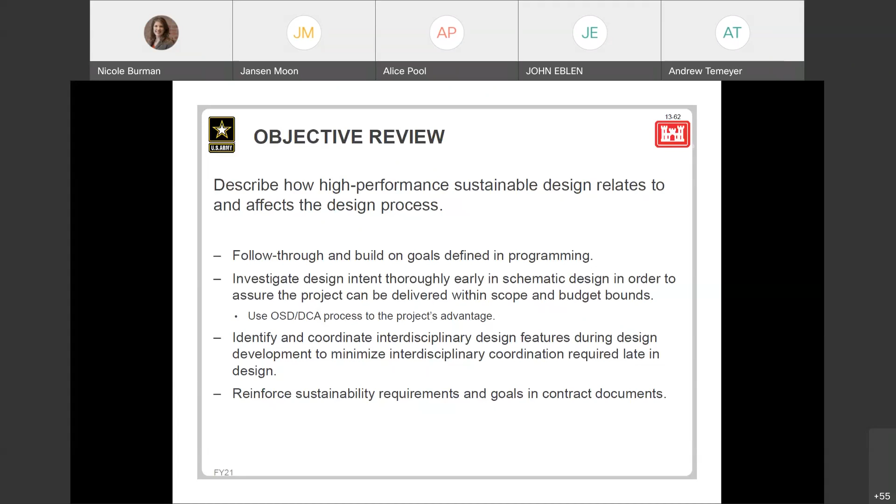I just shot Eric a message in our group. So Jansen, if you want to follow up with that too, we could always send that out. I know our POC just got replaced because our STD POC retired earlier this summer. So I think that's a really good piece of homework that we could take on.